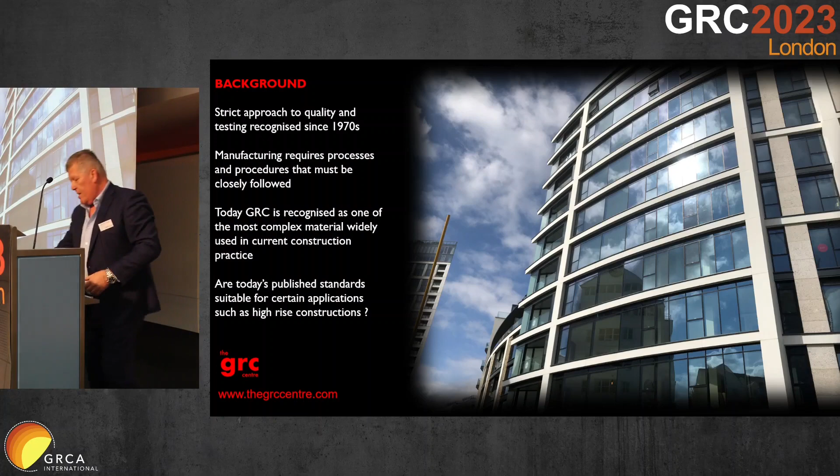I think everybody here that produces GRC is going to be producing it to one of these standards, which are all about quality control. There's the GRCA specification, which is 17 pages. There's BS EN 1169, which is 10 pages. And then in the States, they have PCI MNL 130-09, which is 180 pages. As you can see, there are quite a lot of areas that the American guys look at in terms of quality more than we do perhaps in Europe and other parts of the world.

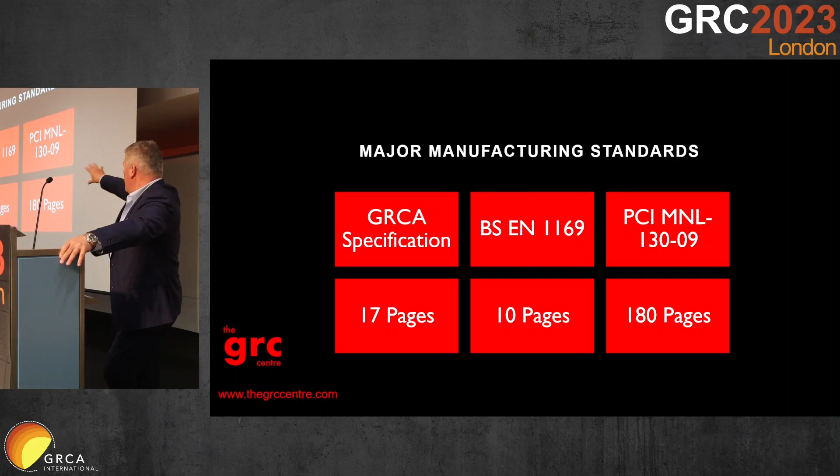And it's important that everybody who's using or manufacturing GRC recognises that both the GRCA specification and EN 1169 are the minimum manufacturing standards for any application, irrespective of its consequence of failure risk. That means that the guy who's making some small architectural dressings to go over windows and heads in house building is producing to the same standard as somebody who's putting GRC on a 300 metre high cladding building.

MNL 130-09 is specifically for large spray GRC applications, and that's the reason why it is far more comprehensive in terms of the quality levels that are required.

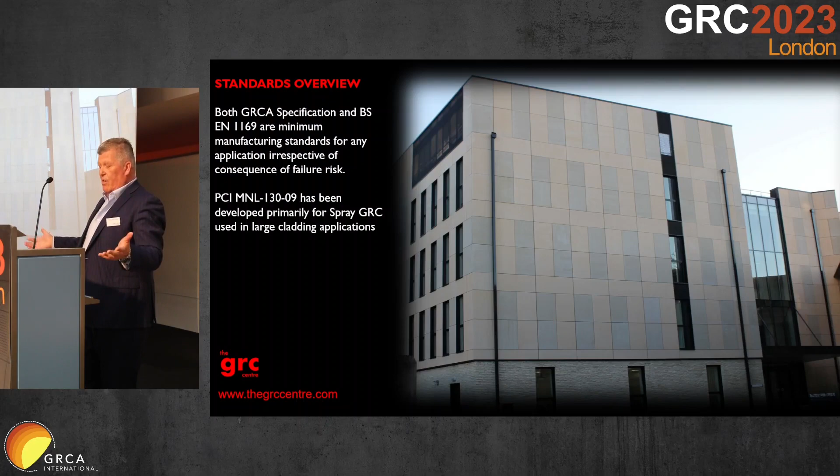So I just want to briefly talk about the role of GRCA in quality. Not everybody within the GRCA agrees with me about this, but I'm very anxious that people understand that we are not a policing organisation. What we should be, and we're trying to be, is an educational body that can help and inform members.

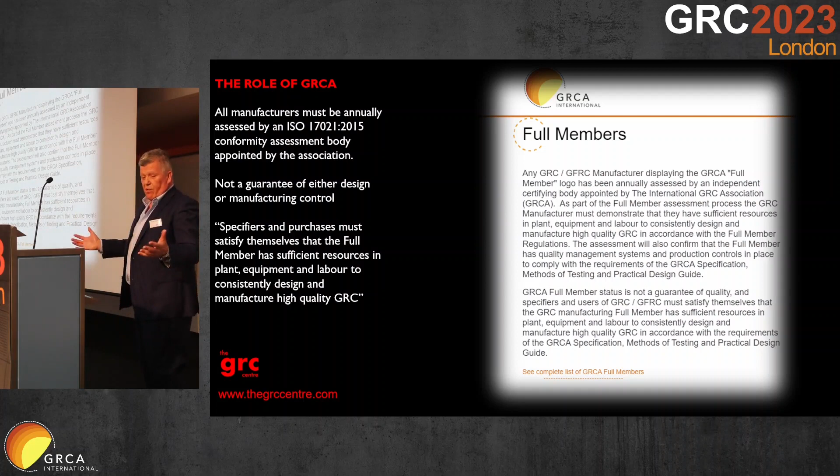And gatherings like this, that we don't have often enough, are great for people to be able to exchange ideas and discuss the different aspects and the different problems that we all face. But we have moved it on, and we've moved it on tremendously, a lot through Simon's chairmanship, where, as he said earlier, he's managed to get a situation where everybody who is a manufacturer has to have an annual assessment by a conformity assessment body who's appointed by the association.

It's important, though, that specifiers, users and manufacturers understand that it's not a guarantee of either design or manufacturing control. It simply isn't. And it's wrong that people would draw that conclusion. This is one of the things that I think people really do need to understand as what we do as the GRCA. We do put that on the website. We make it quite clear what exactly a full member is.

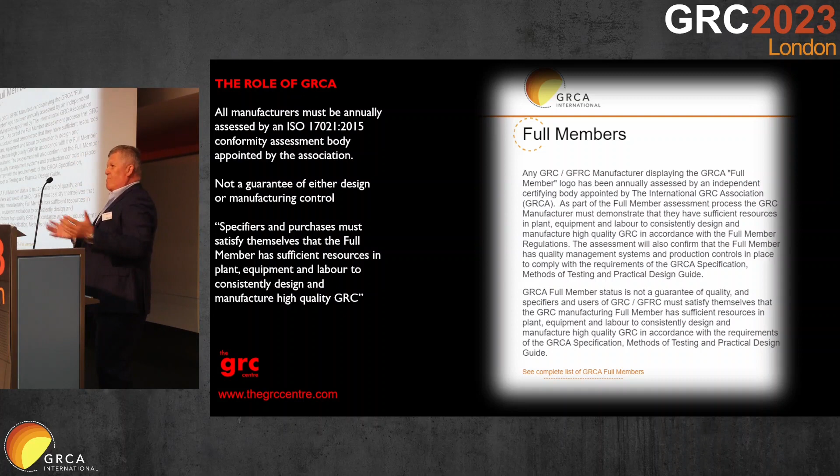But somebody mentioned earlier about people who come in just to get the logo. People come in to get the logo to get jobs, because people assume, oh, it's a GRCA logo, it's high quality. That's not the case. Simply not the case. And I think, as Simon said, some people have not even been able to come to the sort of minimal levels that we require.

So I want to just explore maybe what additional requirements both manufacturers and purchasers of GRC need to think about when they're using GRC on large projects and high-rise construction. Obviously, when you're doing that, any problem with the GRC is going to be a far, far bigger problem than it will be in just a small application.

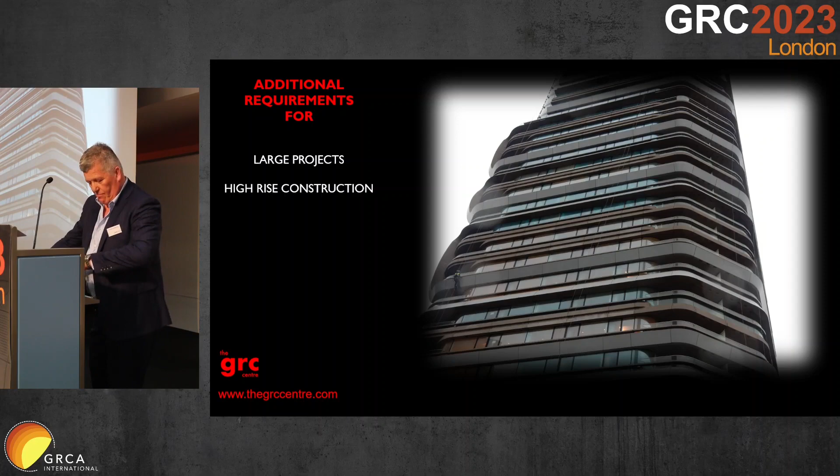One of the most important things that we find in manufacturing is that you've got to have some sort of quality control. Now, I think that's fairly obvious to anybody. But what is important is that the quality control manager in a GRC factory should not be working for the production management team, because there's two different objectives going on.

The production team have got to get high quality GRC manufactured, but have got to hit production targets, and they've got to get the stuff out of the door to produce the cash flows and things that are required. The quality manager needs to make sure that what goes out of the door is right. If you've got those two roles combined, then you have got a potential problem. So whenever we're talking to people about what should be done in the factory, you really need to have a dedicated quality control manager.

And certainly, a lot of the GRC manufacturers do that. And some of them go as far as to have individual quality managers for each spray station, which is obviously a really good system to approach. And then there's the use of independent people. I think people were talking about third-party assessments.

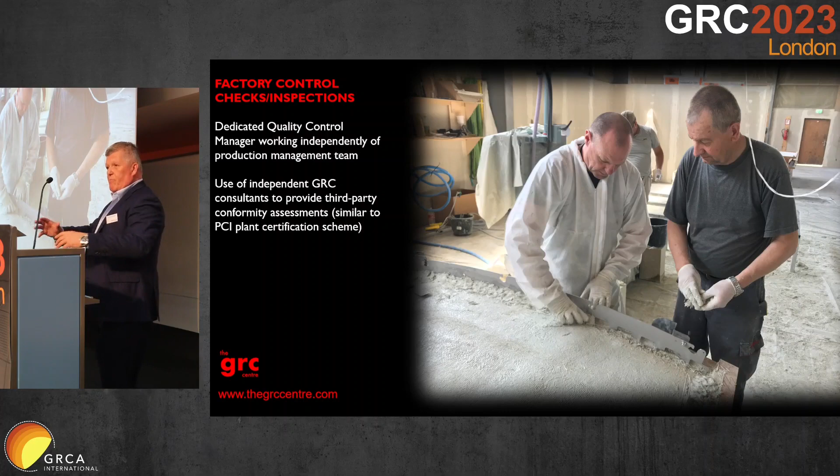And this is, as I understand it, and to be fair, I'm not going to pretend that I know an awful lot about it, but I think that's what they do within the PCI plant certification, where two of their inspectors who are experienced will literally visit plants twice a year unannounced to make sure that everything is being complied with. So that's an area that maybe people should think about: what are we doing about quality control within the factory environment and the production environment.

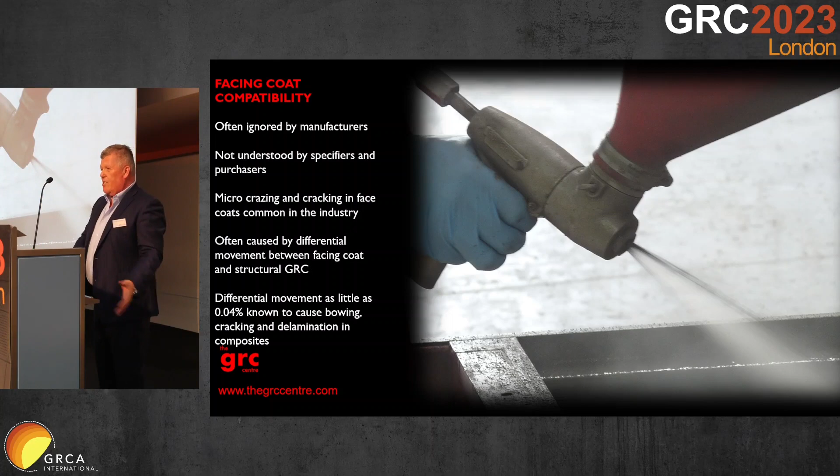This, to me, is the biggest issue in the industry. This is the compatibility of the facing coat with the structural GRC. It's not covered in either the GRCA specification or BS EN 1169. It's extensively covered in the PCI document, and it's often ignored by the manufacturers. And it's certainly not understood by the specifiers and purchasers, who just think of GRC as being GRC, and they do not think that there's actually two different elements to a GRC panel: what you see and what's doing the work behind what you see.

So one of the biggest issues, and I know that you'll all come across this, is micro crazing and cracking in face coats. Probably the biggest thing that we get called in to look at projects about. Can you come down? We've got a problem with the GRC. It's covered in cracks, it's covered in crazing. What's causing it? What's the problem?

There are lots of complicated reasons that cause cracking and crazing in GRC, but one of the causes is a differential movement between the facing coat and the structural GRC. Unless you've been able to balance those mix designs, which often contain different aggregates, and sometimes people put different amounts of cement in, then you can get a differential movement.

If the facing coat and the backing coat are going to expand and contract at different rates, it's going to cause crazing. It might be even worse than that and cause bowing on GRC panels, face coat contracting, pulling the panel into a bow. Could get it the other way, which causes it to crack across the face as we're talking about.

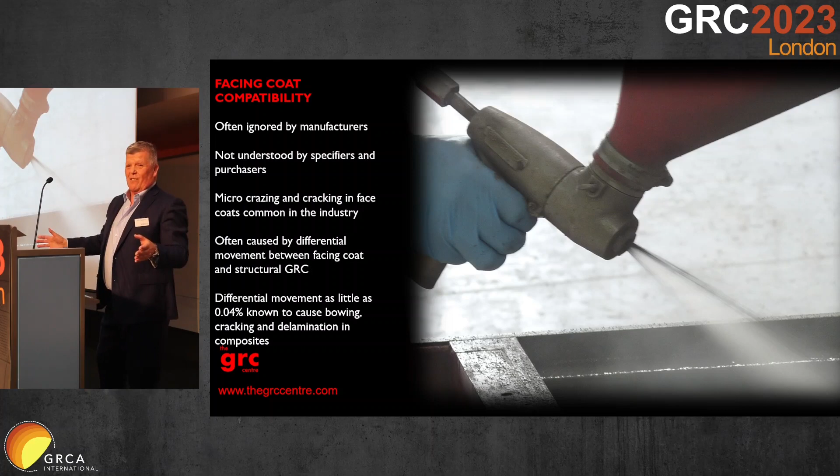So that's something that people really need to think about, what manufacturers need to think about, and what architects need to think about when they're picking colours. Because the last thing that you want is to get a colour or a finish chosen a week before you're going into manufacture. Because with a week before going into manufacture, you've got no time to do any testing as to whether that face coat is compatible with your GRC.

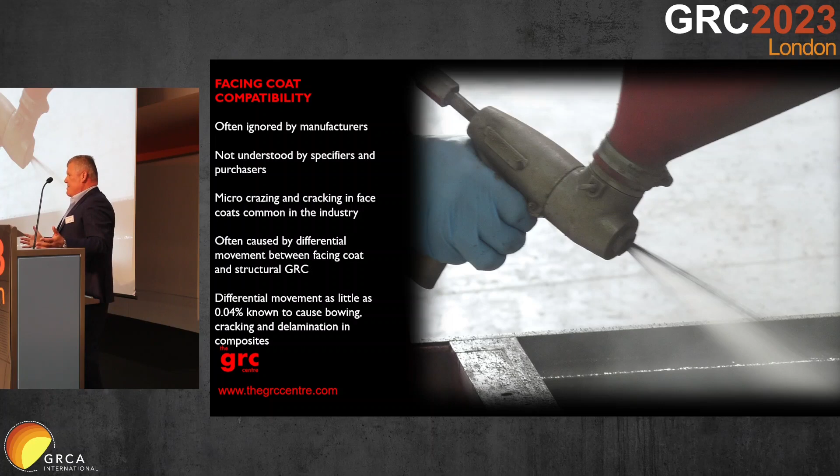If the architect is saying to you, I want some more aggregate in this, or I need a bit more of this, you've no time to test it. You may have no idea what it's going to do. And so the other things that you may want to think about testing on large projects, on the face coat, not the GRC: you may be thinking about compressive strength, reaction to freeze-thaw cycles, combustion, and flame spread.

Because we talk a lot about fire, and we talk about testing GRC. And as the GRCA, we've done tests on generic GRC. We don't do tests on face coats. And that's where the flame spread is. So that's something else that needs to be considered, which means that people need to think about projects further in advance.

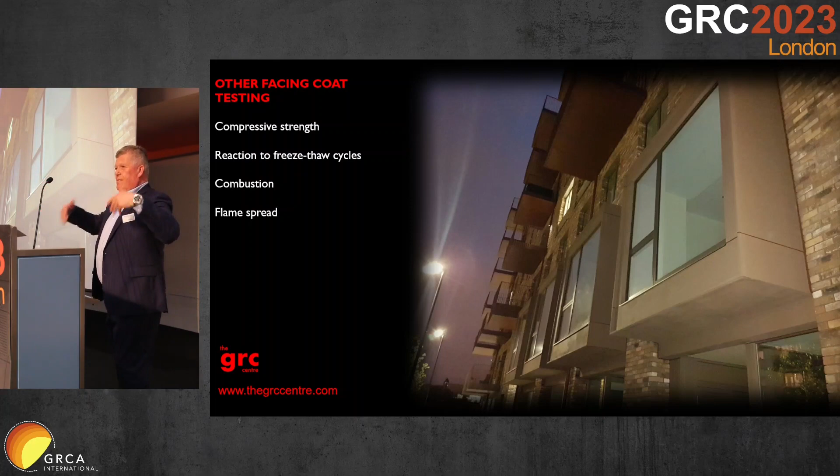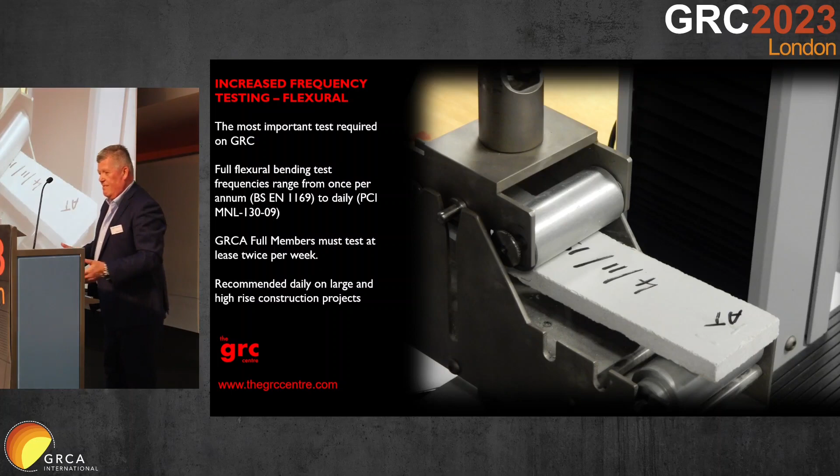This is another thing that I'm really big on, and that's increased frequency testing for the flexural strength. One of the things that I find quite amazing is that in those 3 standards that I talked about, there are requirements for the frequency of flexural testing, at both the LOP and the MOR levels. In 1169, you just need to do it once a year, which is mad. In the GRCA specification, you need to do it at least twice a week. In the PCI specification, you need to do it every day.

And within the GRCA specification, although we say it's at least twice a week, we do actually say this is the minimum of what you should be doing. So the reality is that every GRC manufacturer should have a test machine and access to do regular testing. And it's certainly what we would advise specifiers to put into a specification on large and high-rise construction projects.

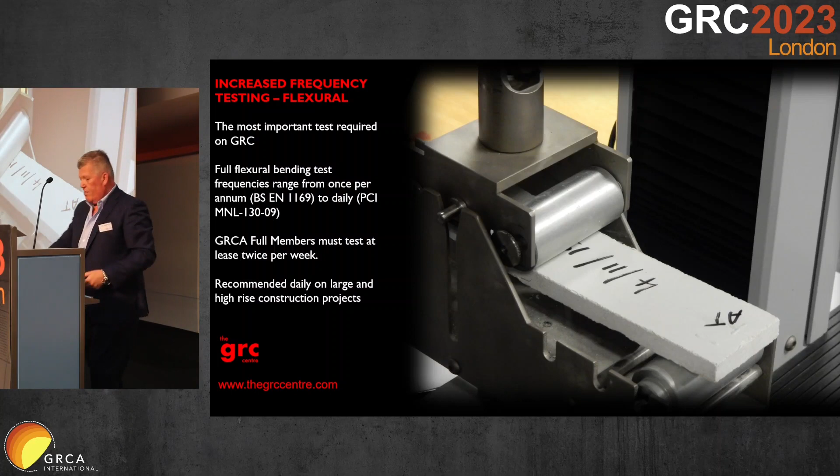Okay. Density. People think it's not important. I think it's really important. People think it's not important because there's no pass or fail. What it is really useful in is looking at the consistency of the material. If you can get consistent densities, then you've probably got consistent flexural strengths. If you've got consistent flexural strengths, you've got good characteristic properties.

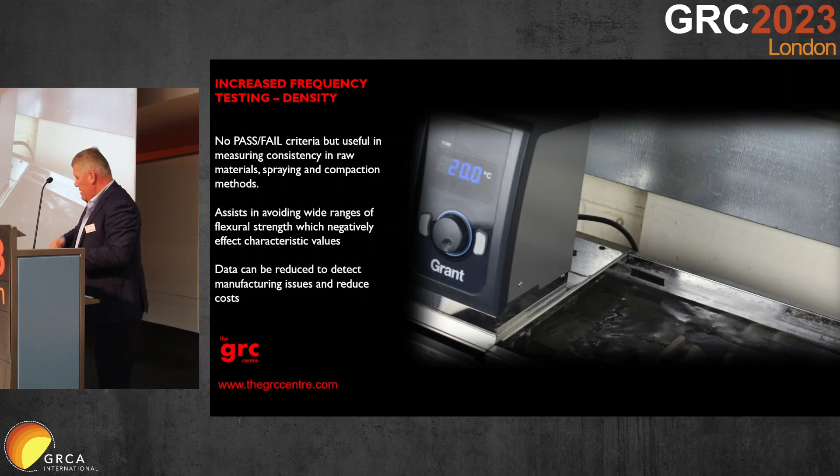So it assists in their manufacturing process, and it can be used to reduce manufacturing costs. Because if you're looking at how your densities are performing, maybe doing it every day, you can start looking at different things. It's a bit similar to what Benny was talking about, looking at these thermocoupling ideas and things like that.

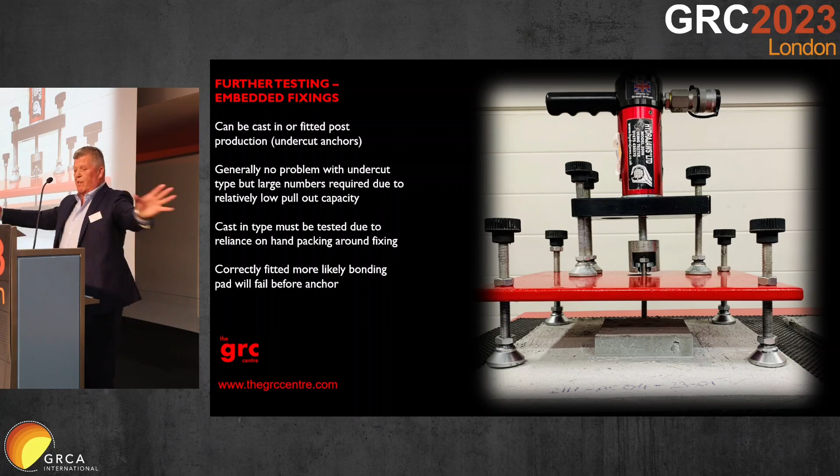This is a really interesting one. We're back to facing coats again. Facing coat thickness and possibly corresponding GRC under thickness. One of the most common things that we see in factories is people applying a facing coat and not measuring it with a pin. They apply the facing coat, they think it's whatever thickness it is, and then they put the GRC on the back and then they put the pin in it.

We get to our 15 mil. When we get to our 15 mil, we find that 7 millimetres of it is face coat and the other 8 is GRC. What I didn't realise until very recently, in fact preparing for this paper, is what can actually happen here is two things. When the GRC is thinner, I'm not an engineer by the way, it'll deflect more. Because it deflects more, it's putting more stress against that unreinforced face coat. So if you've got a GRC that's bending, and the face coat's not reinforced, what's it going to do? It's going to crack. So that's a really big issue that we need to think about.

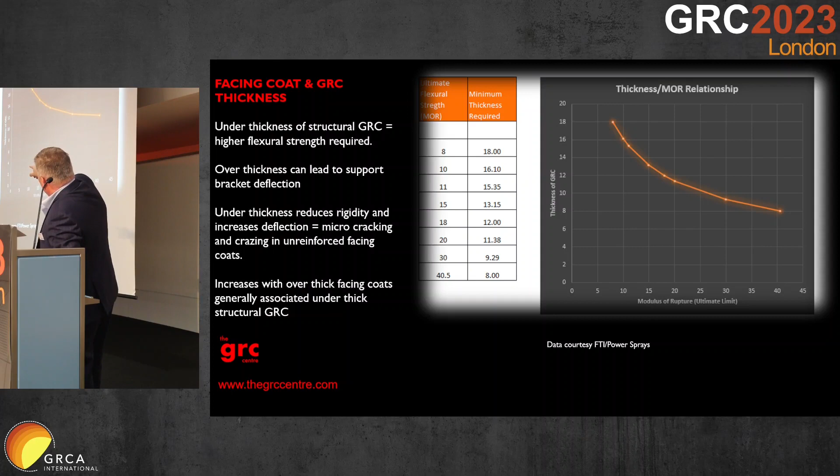The other thing about it, which this graph proves, which again is from my colleague Ian, is theoretically, and it is theoretical because it'll change depending on your different engineering modelling, how much the MOR requirement goes up with the thickness. You can see at an MOR of 8, you need a thickness of 18 millimetres. And you can see how it goes up. When you get to a thickness of 8 millimetres, theoretically you need 40 MPa of MOR. So I can't stress enough how much we as an industry need to start thinking about face coats and face coat thicknesses.

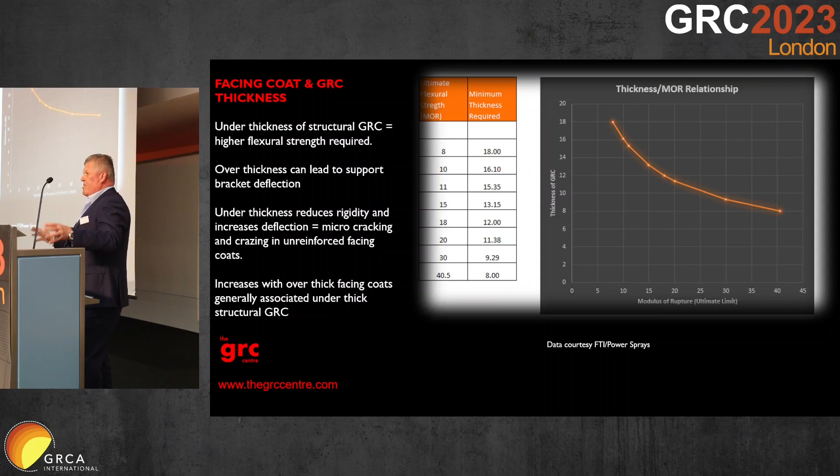Flexural strength testing, big bugbear of mine. We've talked about the increased frequency of flexural testing, but we test these little sample boards. These sample boards are typically 0.3 to 0.4 square metres, sprayed up as a flat panel, once a day, twice a week, once a year. The guy sprays it up, compacts it, sprays it up, compacts it, and it goes away and gets tested. Is that representative of what's actually going into a product? Where you can have a panel that could easily be 10 times the surface area, and it's a complex geometrical shape. No longer is the guy spraying like this, he's spraying like this. No longer is he compacting down, he's compacting like that. It may even be compacting like that as well. So that's something that maybe we need to think about.

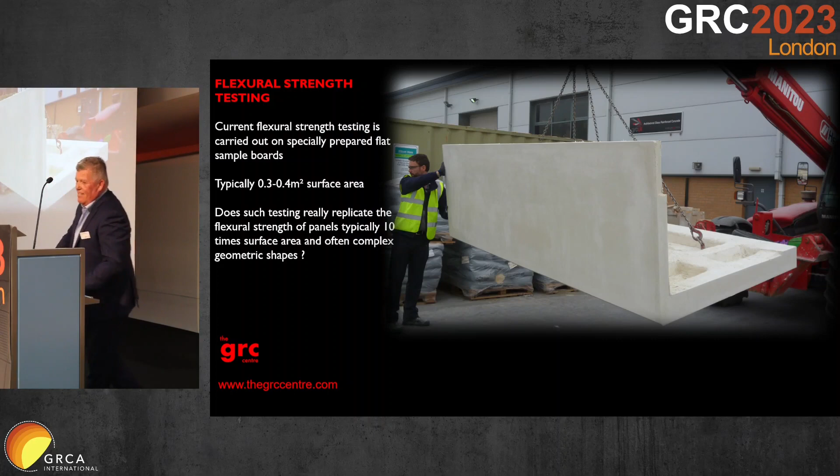Finished product testing. This is where we actually bring these things together and say, really, should we be doing an element of finished product testing to see if we've got the face coat thickness right, the structural GRC thickness right, flexural strength right? Yeah, I think we should. Now, the big issue is, of course, that it's a destructive test, which means that you've got to make a panel. A panel's got to be selected for testing. But because I'm from a manufacturing background and I understand the commercial side of it, I've tried to work out what the cost of testing 2.5% of your production would be against an entire GRC project. That's taking into account the design, the GRC, the steel bracketry, and the installation cost. And doing a 2.5% population test on a finished product is going to add less than 1% to the finished GRC contract value. And to me, that should be a fairly easy sell to a specifier and user.

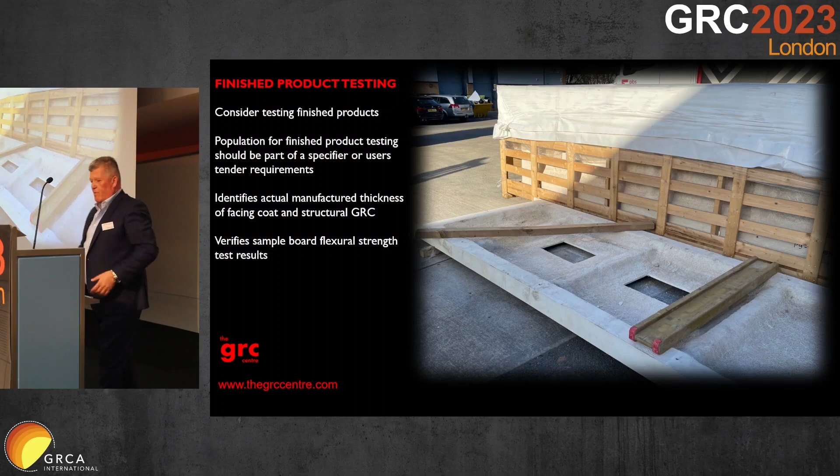Right, I'm going to wrap this up very quickly. So just some final thoughts here that I think we need to do. Growth in the GRC industry was restricted until very recently by in-service failures, a direct result of either lack of understanding of the strict quality controls or just simple cost cutting. Although the GRCA has worked very hard, and we have worked hard to address this quality issue, there are still problems and they still exist to this day. I'm getting called out every week: go look at this, what's wrong with this? Why has this done that? How's it done that? We're all reliant on GRC for our livelihoods. We cannot afford our industry to be affected by this again.

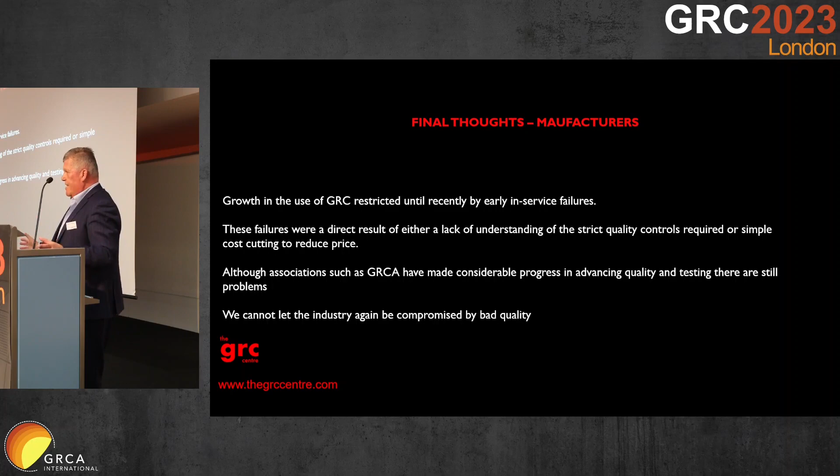So my message to people who are actually specifying and using this, if I just encompass it: don't rely on the full member logo for a guarantee of quality, because you haven't got it. You've got to adopt a buyer beware attitude and procure GRC from manufacturers who can demonstrate an uncompromising approach to quality control and testing. And the message that I want to leave is, we all talk about price and how much it costs and whose order is the cheapest. This is not a product that you can buy on price. If you buy it on price, you're generally suffering through quality. It really does matter. Yeah?